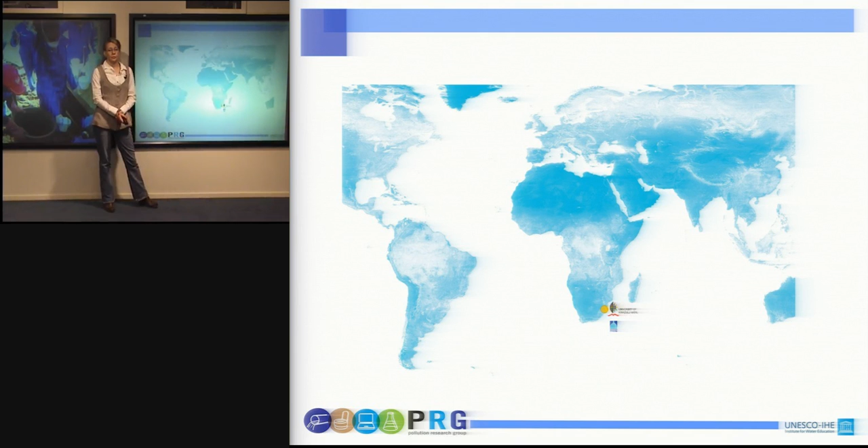The qualitative characterization has been already covered by Linda Strande in one of the other keynote speeches, and for that reason I'm not going to cover it. I work at the Pollution Research Group at the University of KwaZulu-Natal, which is based in Durban, South Africa, and have been working in the field of water and sanitation for the last 4 years, particularly focused on fecal sludge characterization.

What are the characteristics of fecal sludge and how do they vary? The fecal sludge characteristics are very heterogeneous. They depend on many factors, including environmental factors, such as geographical location, the demography of the region, then also climate conditions, the presence of underground water table, and also soil type. The type of on-site sanitation technologies is also an important factor, as well as the quality of the construction.

Also, we have the age of the sludge and the filling rates. So the slower the filling rates, the less frequent the emptying of the sanitation facility would be, and then the more aged the sludge would be. So the more aged the sludge would be, then the more stabilized it would be.

Then also we have another factor, which is the toilet use, which is defined by different specifications, such as number of users and their diet. Also the frequency of the use, whether the toilets are dry or wet, whether they're flush toilets or there is no water introduced into the system.

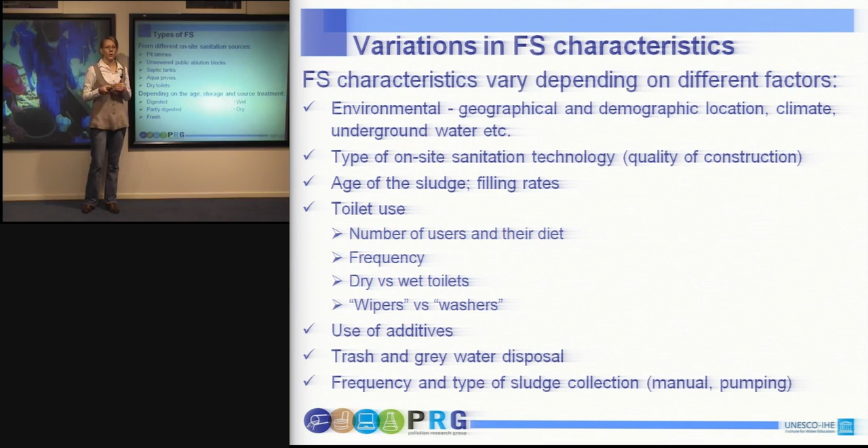According to this, we can distinguish between different types of fecal sludge. We can classify them by the type of on-site sanitation sources, such as pit latrines, septic tanks, dry toilets, such as urine diversion or composting toilets. Also, depending on the age, the storage, or the source treatment, we can have stabilized or digested sludge, semi-digested sludge, or fresh sludge. Depending on the type of use, on the type of system, whether we flush or not, we can have wet or dry.

Coming back to the fecal sludge treatment targets and objectives, the main aim is to provide safe environmental and public health, which supports the entire chain of fecal sludge management, starting from treatment, discharge, end use, or disposal. To meet this aim, there are a number of objectives set, which are pathogen inactivation, stabilization of the organic and the nutrient matters, and also the safe end use and disposal. The dewatering is an important step because this provides significant reduction of the volume of the fecal sludge, which makes it a lot easier for transportation or further treatment.

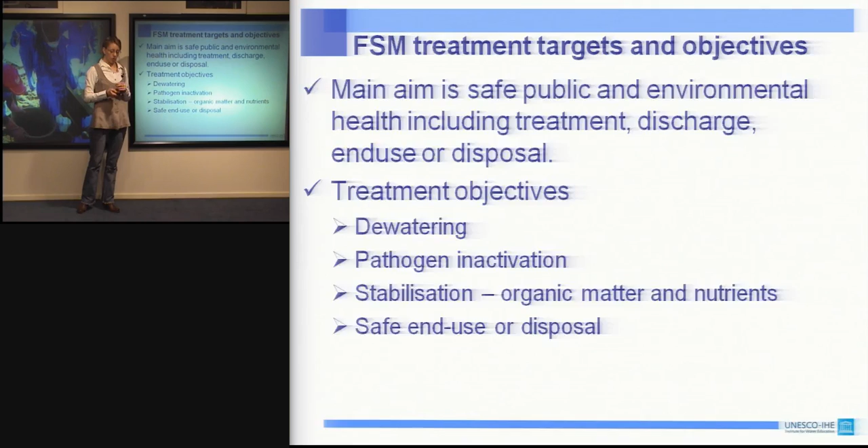So what are the important parameters for fecal sludge characterization? I have summarized in a table some of the most commonly used and essentially the most important parameters for fecal sludge characteristics. Some parameters are not included here. This doesn't mean that they are not important for specific types of technologies or specific purposes, but this is a broad summary. I have grouped them into 4 categories, and the first one is chemical properties. These include moisture content, total solids, suspended solids, ash content, and volatile solids content. Also, COD, which could be total or fractionations of the COD, pH, also ammonium, TKN, phosphates, orthophosphates, potassium, etc.

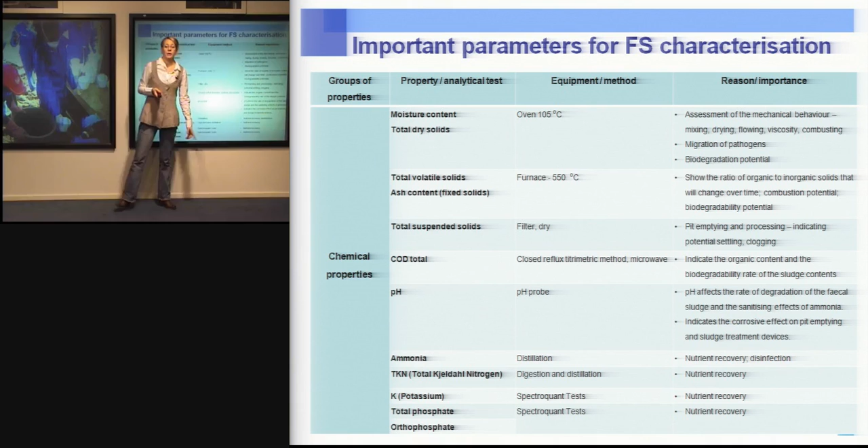In the last column, I have included the reason and the importance of why we need to determine these kinds of properties. For example, if we take the moisture content, this gives us an assessment of the mechanical behavior of the fecal sludge as a material for processing like mixing, drying, flowing, or combusting. It is also an indicator about the biodegradation potential of a sludge, knowing also the age and in combination with the COD values. And also, it's a good indication about the potential migration of pathogens. If, for example, we take the ammonia, TKN, phosphates content, and potassium, this gives us the potential nutrient recovery values, given that the fecal sludge has been treated for pathogen inactivation.

The next group is physical and mechanical properties, such as density, particle size distribution. Also, we have sludge volume index, osmotic pressure, rheological properties, and sludge penetration resistance. Why are these important? They provide background information which could be quite essential for the design of pit emptying devices or mechanical treatment of fecal sludge. If we take, for example, the rheological properties, they give a good estimation of the change of the viscosity with increasing shear rate, which also provides the essential information for design of pit emptying equipment and also mechanical treatment processes.

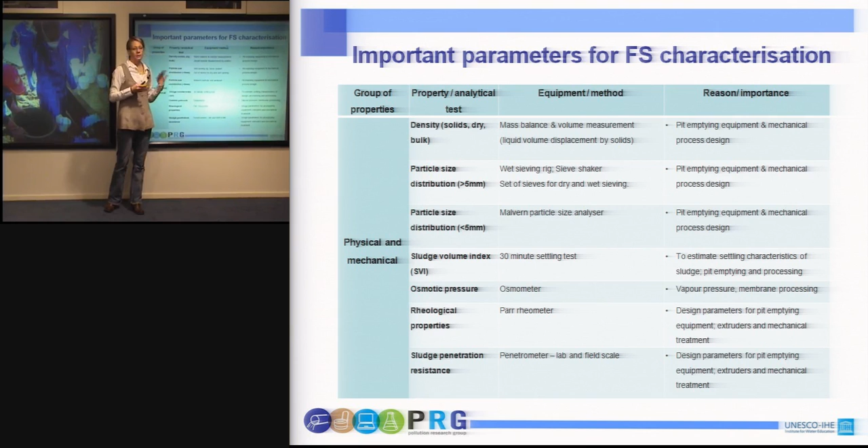The next group is thermal properties. They're mainly important for thermal treatment processes or design facilities for processing such as combustion, heating, and drying. Here we have incorporated thermal conductivity, specific heat, and calorific value.

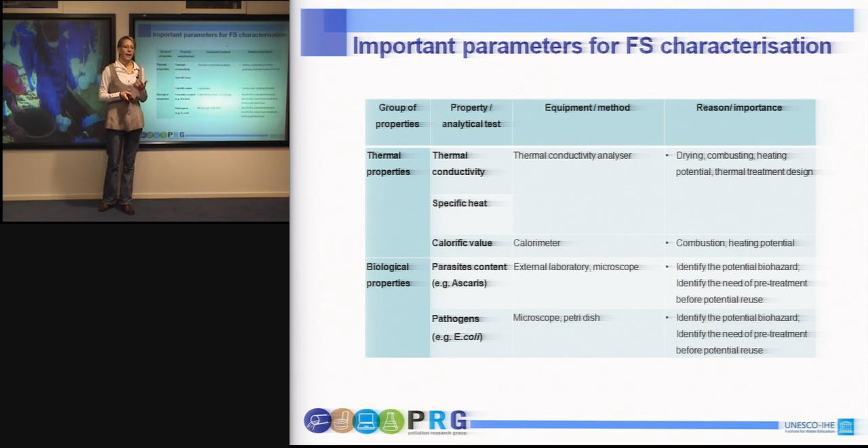Also, the last group is called biological properties, which incorporates parasites content and pathogen content. They are very important, coming back to the aim of fecal sludge treatment, providing safe public and environmental health. So if we take, for example, the Ascaris content, this is a very important indicator. Why? Because the Ascaris eggs are very resistant to any type of treatment technologies. So it's considered that if we manage with a certain treatment technology to destroy the Ascaris eggs, then supposedly we have already destroyed any other pathogens present in the sludge.

What are then the challenges when we measure such fecal sludge properties? We mentioned already that the fecal sludge is highly heterogeneous and varies between different conditions or different sanitation facilities. So if we take sludge coming from different on-site sanitation facilities, the properties may vary highly. But also, if we take the sludge coming from one and the same type of on-site sanitation facility, but from different toilets, we can observe a high variation as well in the properties, depending on the number of users, the load, etc., factors that we mentioned early on.

And for that reason, we also have high variation of the properties when we collect sludge coming from one and the same toilet facility. Why? Because at the different sections of the sludge, you have different degradation rates, hence different moisture content, and this would also result in heterogeneity of the sludge properties within one and the same toilet facility.

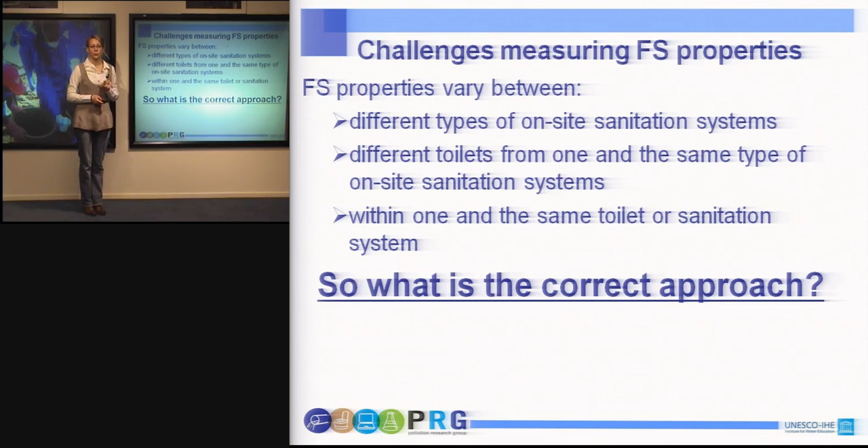So what is the correct approach for measuring the fecal sludge properties then? This would be the development of standard methods and procedures, or so-called standard operating procedures for fecal sludge analysis. They could be applicable for the sampling process, for all the different analyses we mentioned, whether the analyses are performed in the field or in lab conditions, and also covering all the health and safety procedures during the entire process of sampling, transportation, storage, analysis, and disposal.

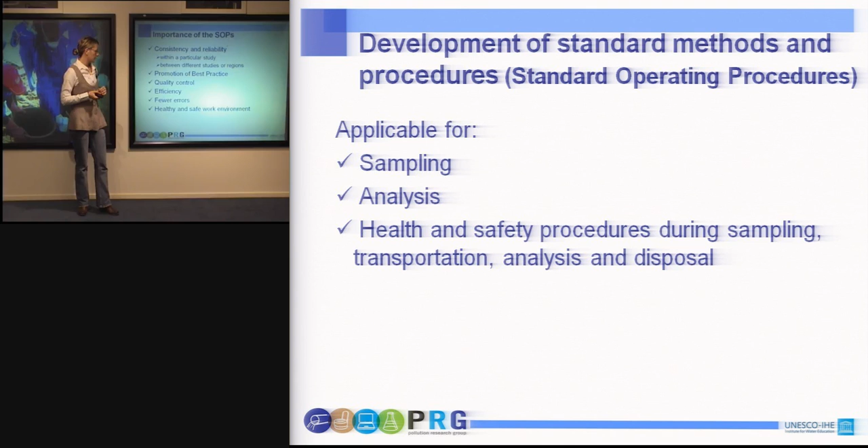So having standard operating procedures is important in many fields for various reasons. Some of them are summarized here, like consistency and reliability of the data, also good quality control, efficiency of the testing methods, reduction of errors, and a healthy and safe work environment.

Currently, there are no standard operating procedures for fecal sludge measurement, and standard methods for water, wastewater, and soil are adopted for the fecal sludge. However, these methods are not the most suitable because the fecal sludge differs in its characteristics. As we said, it's highly heterogeneous, but it also has higher solids content compared to water or wastewater. And then we have a high variation even between the different sludges coming from the different on-site sanitation facilities. So the lack of standard methods for fecal sludge results in incomparable data sets generated between different regions and institutions, which is already raising a problem.

What would be the way forward? There is a need for collaboration between institutions working on fecal sludge characterization for development of standard operating procedures for fecal sludge characterization. And this will not be a once-off task because the methods evolve and change over time.

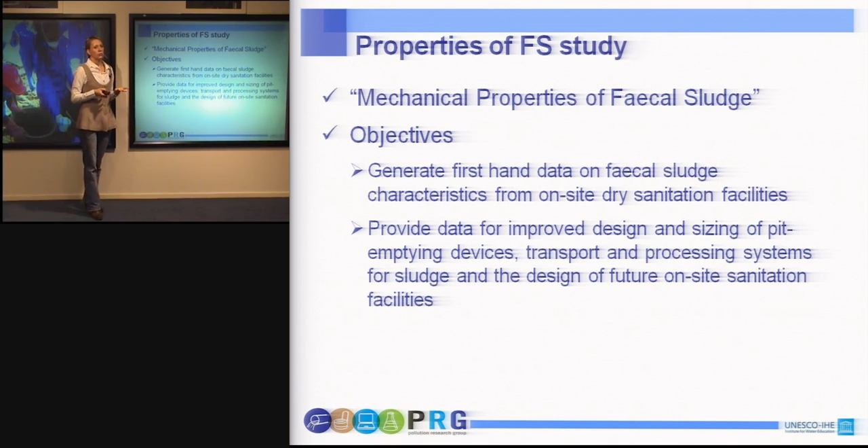The project is funded by the Bill and Melinda Gates Foundation. It has been already completed. The main objectives were to generate first-hand data for fecal sludge characteristics from dry on-site sanitation facilities in Durban, South Africa. And then the other objective was to provide data for improved design or sizing of pit emptying devices or devices for transport and processing of sludge.

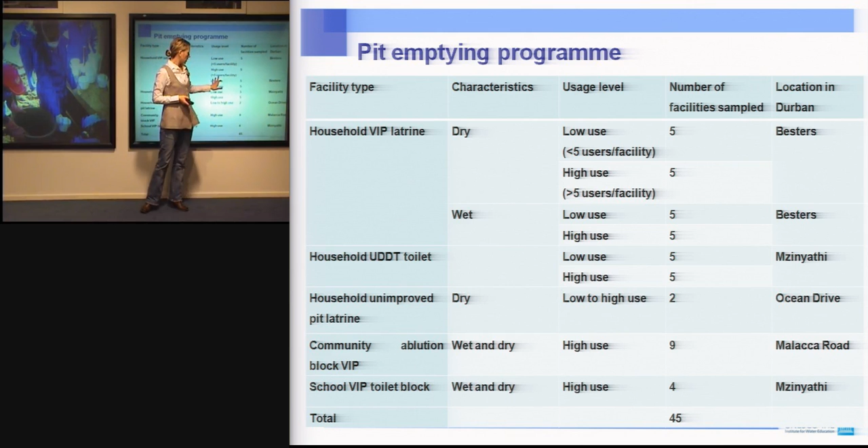There was an extensive pit emptying program focusing on dry on-site sanitation facilities. We have emptied a number of different ventilated improved pit latrines, which were on a household level or community ablution block or school level, also urine diversion toilets and unimproved pit latrines. We have also aimed at a different usage level, which incorporated low use with less than 5 users per facility or high use with over 5 users per facility.

And then, when the project started, we firstly proceeded with the sampling. So what we realized then is that no matter how good our standard operating methods for testing and analysis in the laboratory are, because of the heterogeneity of the fecal sludge, we have actually questionable data set once again when we speak about sampling.

So, for example, I mentioned early on that we can have large variation between sludges coming from one and the same type of facility or from different ones. So how do we ensure, when they have different filling rates, when they have different age, that the data is comparable between each one of them?

So what we did firstly was with the dry household ventilated improved pit latrines, we selected samples from 10 dry and later on 10 wet pit latrines. So we collected samples from different heights of the sludge which was accumulated in the pit, and actually developed a method which was followed for all the other pits that have been sampled.

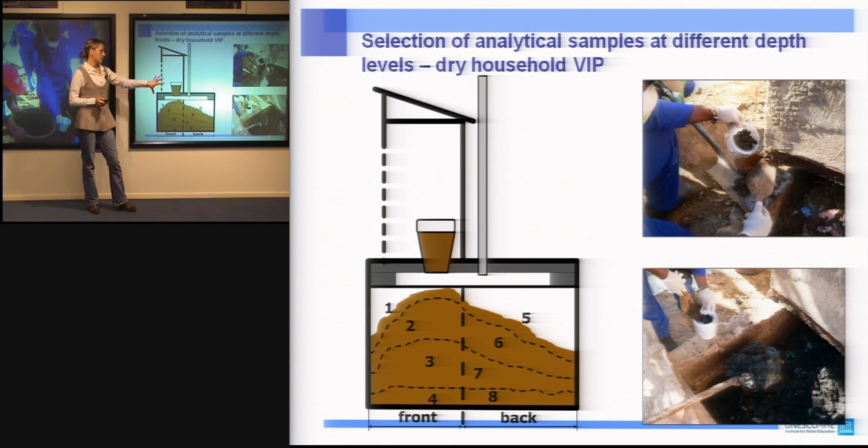And then the same method was used for each other dry household pit we have been selecting, and we compared the data between the different layers or as a composite sample. For the wet VIPs, they're called wet not because there is any flush water used, but because the pit, for some reason, was full of liquid.

We established that most of these pits were at the bottom of the hill, and although there was no scientific evidence, we think that it had something to do with underground water infiltration or the effect of the rainy season. So what we discovered was that we had liquid in the pit, and then the sludge was concentrated at the top. So we developed a different method for sampling from this pit because it was not exactly comparable with the previous dry ventilated improved pit latrines.

For urine diversion toilets, again, we developed a different type of sampling procedure, which incorporated two types of vaults, active and inactive vault. The active one was already in use, and the sludge was a lot more fresh. And then for the inactive or the standing vault, the sludge was a lot more dry and stabilized because it hasn't been used for a certain period of time.

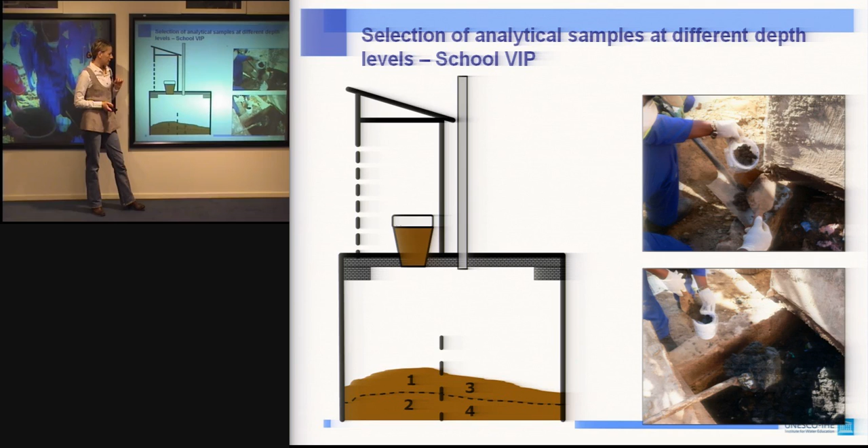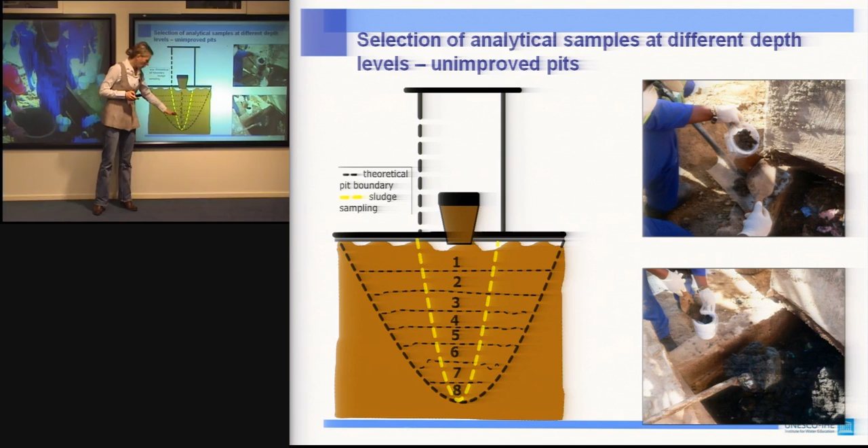For school ventilated improved pit latrines, we had a similar method as for the first one, the household pits. We also had unimproved pit latrines which were already not in use at the time we went sampling. And then we just dug holes and collected samples from different levels of the pit.

So just to summarize, what is important when we develop fecal sludge sampling methods? The sampling should be, first of all, based on the local fecal sludge management context. Why? I was speaking about pit latrines, which are very appropriate for the context of Southern Africa. But for example, if you go to Southeast Asia, where we have pour flush toilets, and the sludge is collected into septic tanks, then the context of sampling would be completely different. Maybe it would come from the truck, or because the sludge is very much liquid, a different technology would be developed.

Then also the sampling methods should fit the end use of the data. So it depends what we need the data for. That's how we need to develop an appropriate sampling method. For example, if we need a large amount of sludge for testing of a new prototype, then we don't need to collect the different small samples. We need to collect a composite sample of the entire pit.

Then the standardized methods should be applicable for the different types of on-site sanitation facilities, as we already mentioned. We can't apply one and the same method for every type of on-site sanitation facility because it simply won't be applicable. And then the sampling timeline must be coordinated with the laboratory analysis because we would like to avoid storing samples for a long time, and it's better to collect them, transport and store them for a short time, and then perform the analysis.

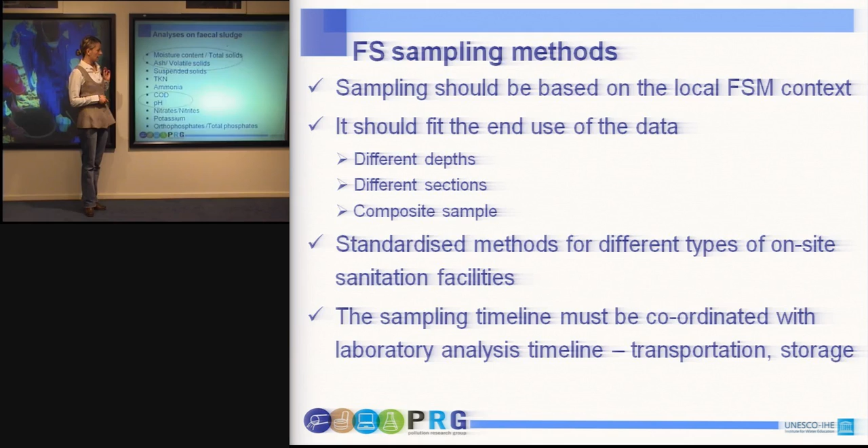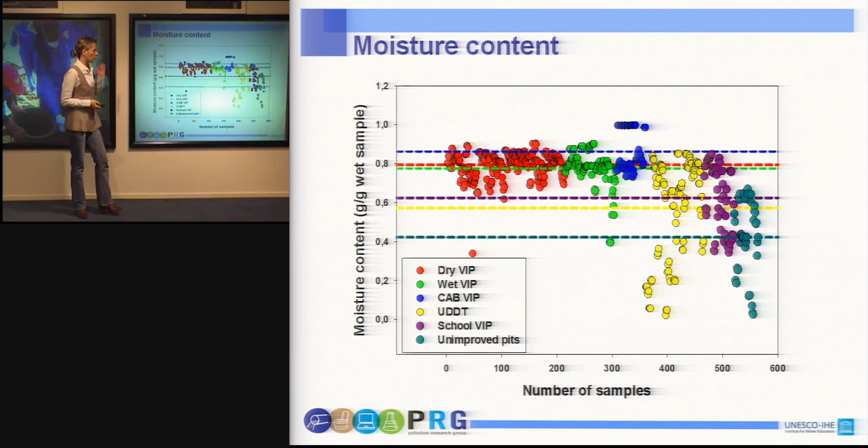If we go to the ash content, we see an even higher variation of the properties. For example, for dry household VIPs, the ash content varies between 0.2 to 0.8 grams per gram dry mass. It is very important to stress that we have been expressing the properties in gram per gram dry or gram per gram total solids. Why? Because all the sludges vary significantly in their moisture content. And unlike wastewater, where the moisture content is over 98–99%, here we have a large variation, as we saw earlier on. And we would like to have a more stable basis for comparison of the data. So that's why we have been expressing it in gram per gram total solids.

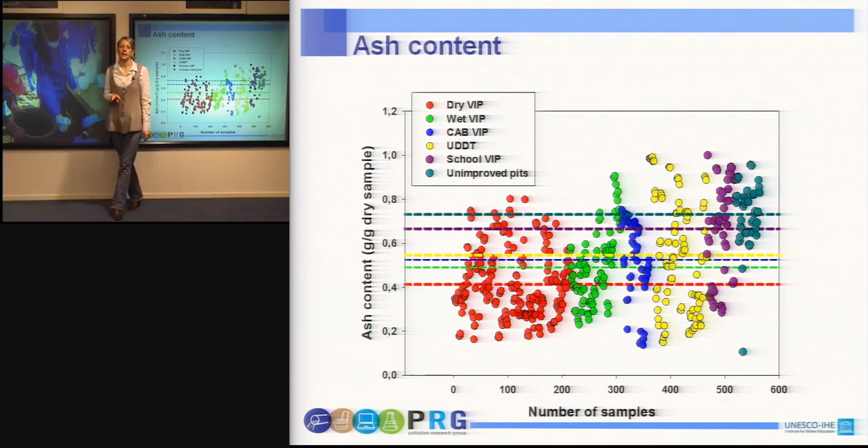So we see, for example, here for the urine diversion toilets, we have a much higher ash content, which is also, again, coming from the standing or inactive vaults.

The total COD also varies quite significantly. The higher values usually come from the top layers where we have a very fresh sample. It varies between nearly 0 to 1.6 grams COD per gram total solids or dry sample. We can see that the stabilization process for some of the urine diversion toilets and some of the aged samples from the unimproved pit latrines has taken place.

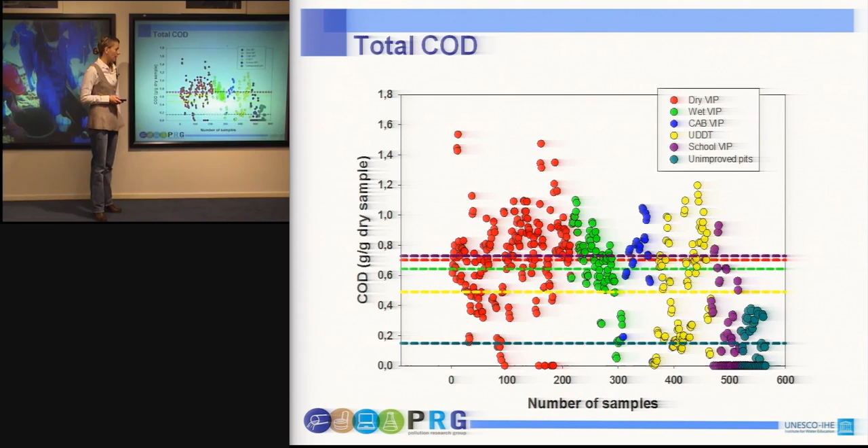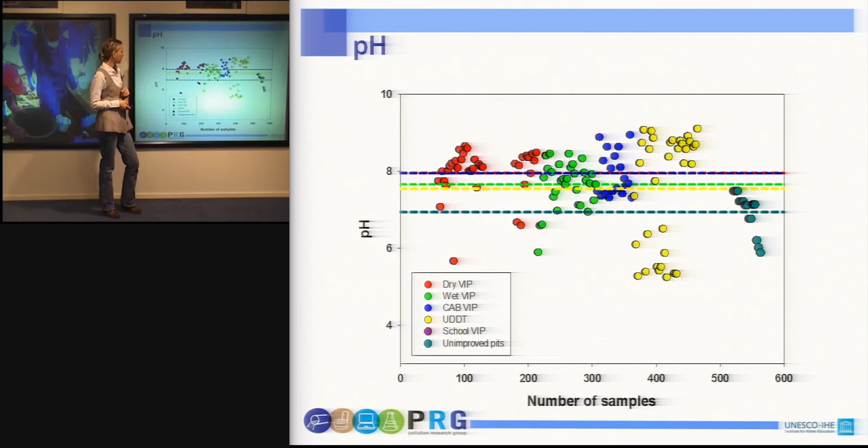The pH variation was also quite significant. However, we had established a range. The average values, for example, for dry and wet VIPs was something between 7.5 to 8. The calorific value also presented very good variation. Expectedly, there is a correlation between the COD values and calorific values. The aged samples, such as unimproved pit latrines, demonstrated much lower calorific value than some of the fresh samples. The average calorific value was about 15 megajoules per kilogram, which is very close to that of wood.

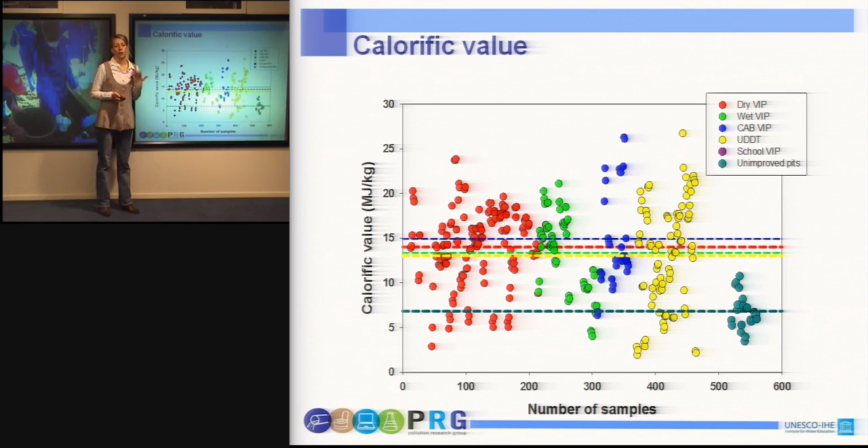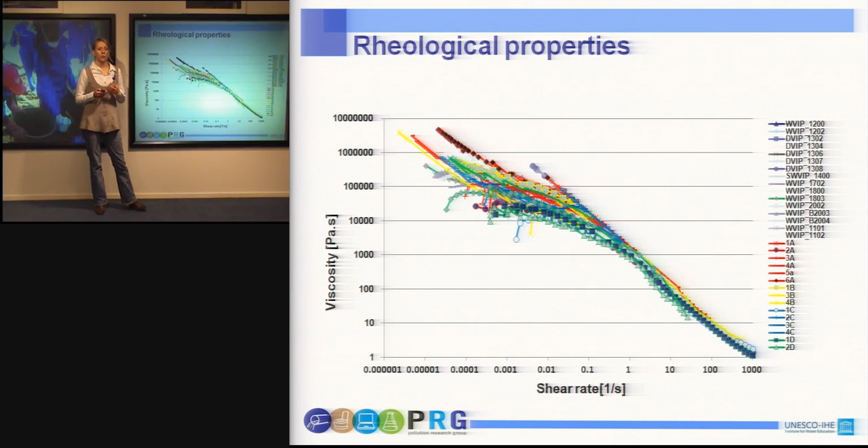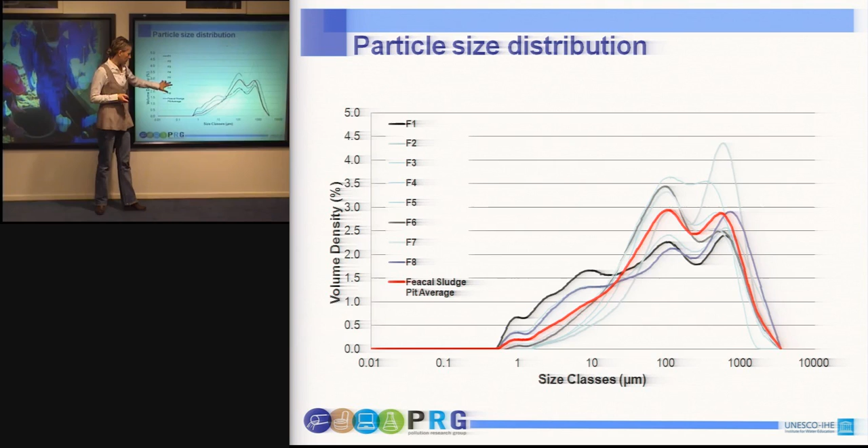Then if we move to the rheological properties, it was observed that the fecal sludge has shear thinning with increasing shear rate, which means that it turns more liquid with increasing shear rate, which is good for the design of pit emptying devices and pumping. Then we have particle size distribution within one and the same pit at the different sections, as was demonstrated early on.

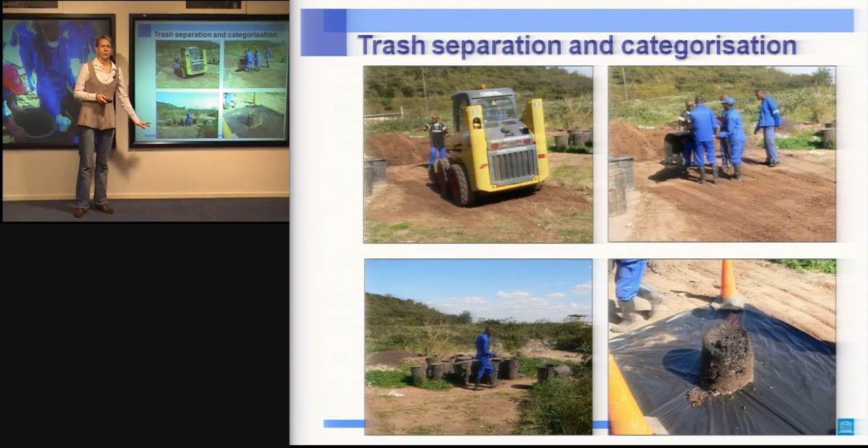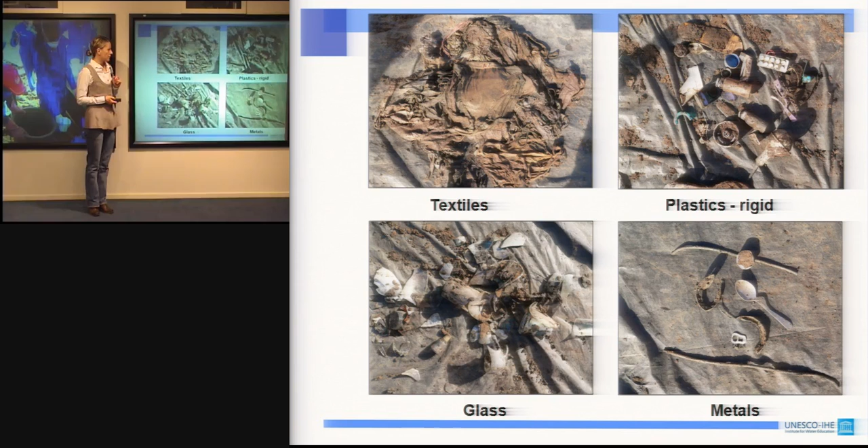We did some studies on the trash content of pits, or the trash mixed with fecal sludge in some of the on-site sanitation facilities we have analyzed. We did a manual categorization from 3 or 4 different on-site sanitation facilities, and categorized them by different material groups, such as paper, soft plastics, hair extensions, menstrual products, textiles, glass, etc. So what was the distribution?

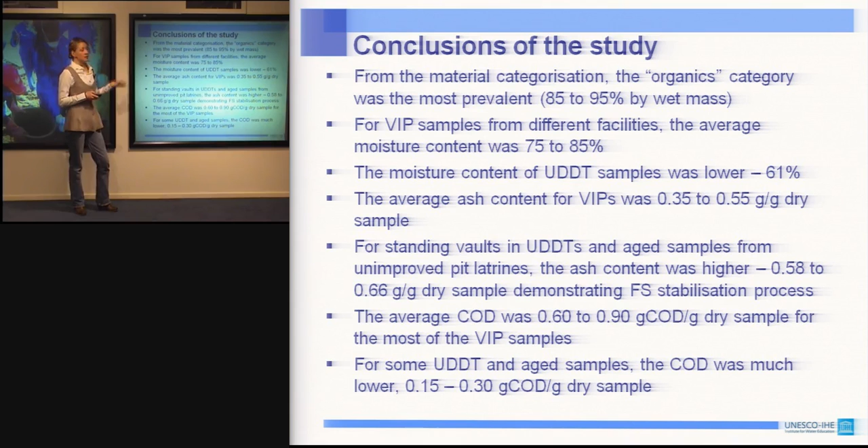So the conclusions of the study, we've already passed through most of the information: 75 to 85% moisture content for all the VIP samples, 61% for urine diversion toilets. The average calorific value was between 11 to 15 megajoules per kilogram. For the aged samples it was just 5.

It's important also to mention, it didn't come on the slide, but we did quite a lot of analysis on helminth eggs or Ascaris content, and most samples demonstrated values higher than the limit set by the World Health Organization, which is 1 helminth egg per gram of total solids, which shows that this sludge needs to be treated further for pathogen inactivation.

So the most important part of the study was what were the outcomes, what did we achieve as a result of this study. First of all, we developed fecal sludge sampling methods and techniques, which also helped us to develop standard operating procedures for analysis of fecal sludge. The study was a baseline for further similar studies by other organizations because we disseminated our knowledge and collaborated with other organizations to provide a similar platform of study. And we disseminated the crucial information required by other partner organizations for pit emptying or other treatment technology designs.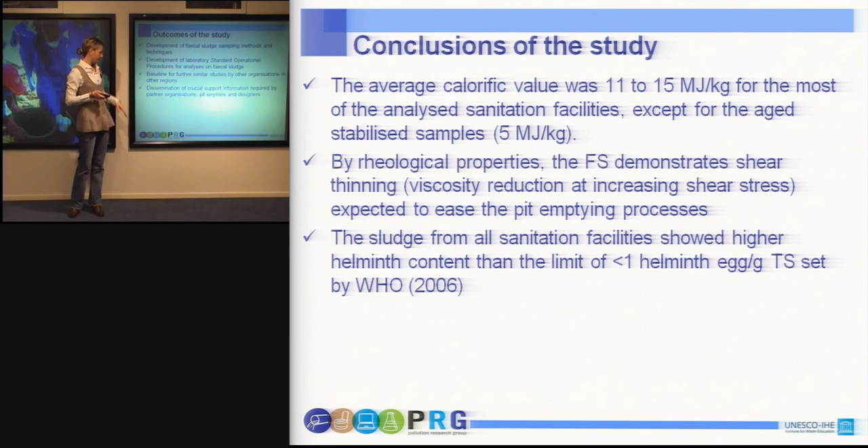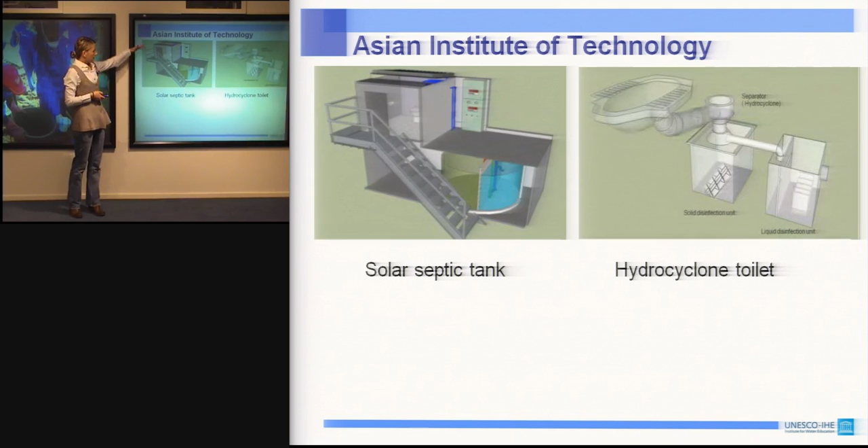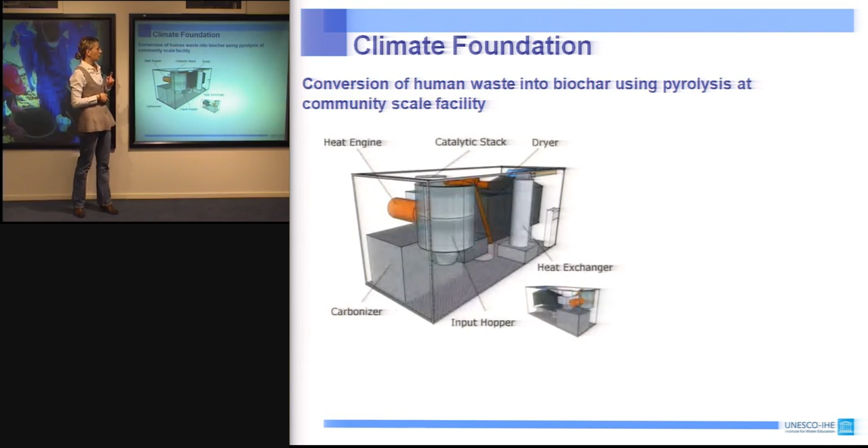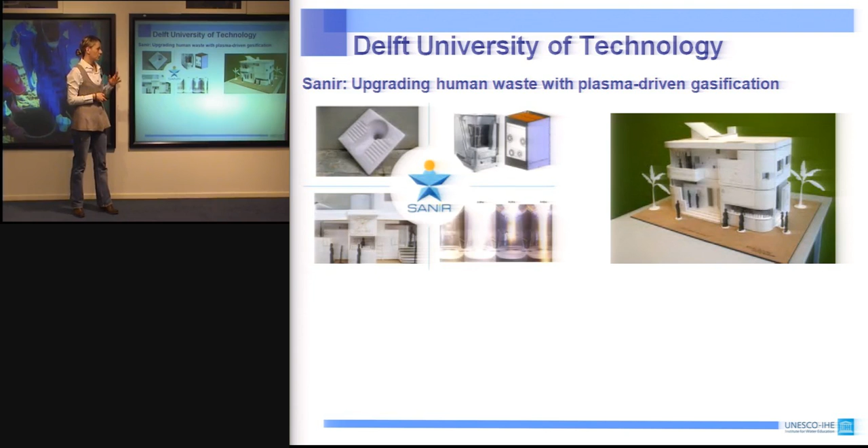Just to give an example of the different organizations we have been collaborating with. This is just a small list of them, to show how we collaborated to support them in developing different technologies. That's the Asian Institute of Technology with their solar septic tank and hydrocyclone toilet, California Institute of Technology, Climate Foundation for biochar production from fecal sludge, the nanomembrane toilet at Cranfield University, Delft University of Technology with their plasma-driven gasification system, Duke University with supercritical water oxidation, the Blue Diversion toilet by Eawag,

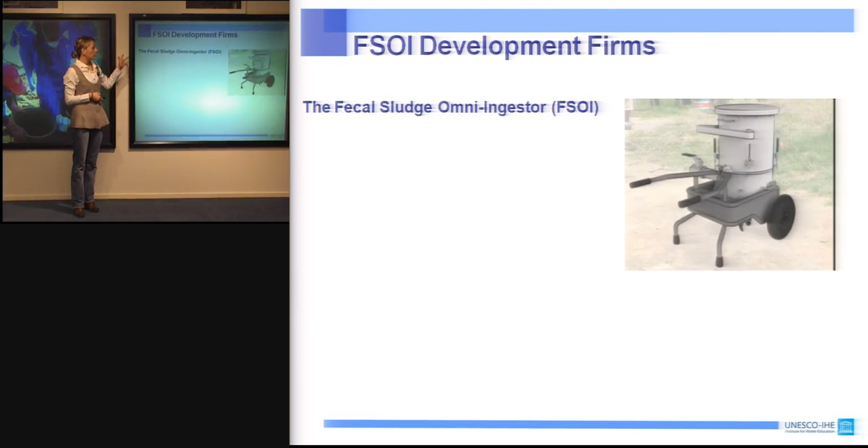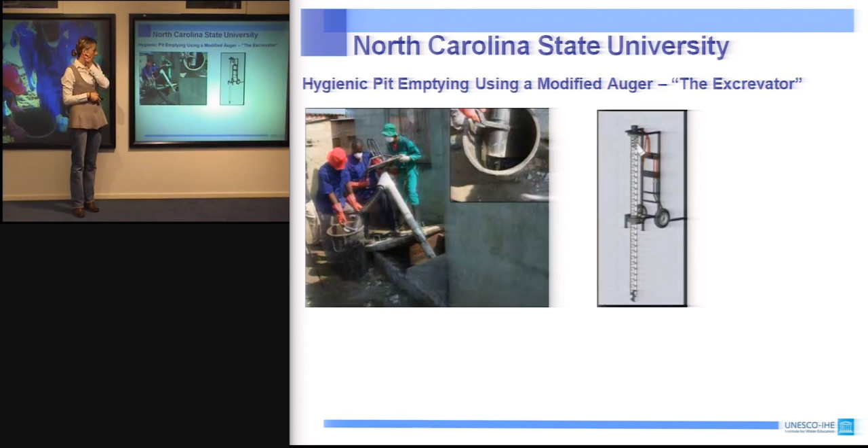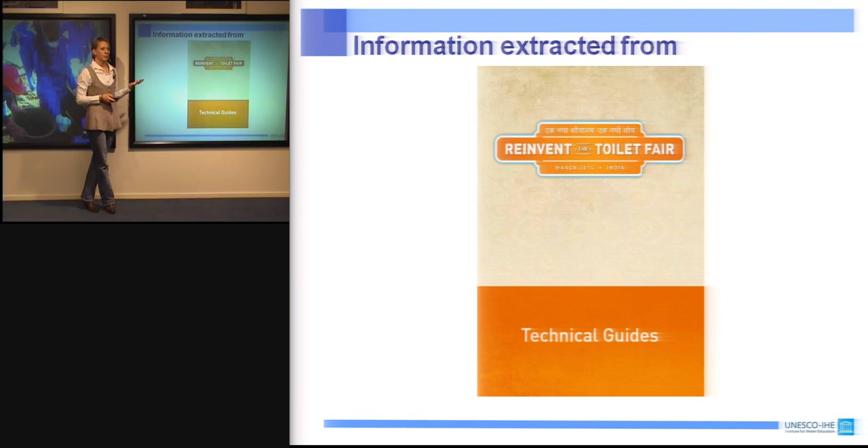the Omni Ingestor for pit emptying, the Omni Processor for large thermal treatment of sludge, pressure cooker type of treatment. Also, we have North Carolina State University with the Excrevator for pit emptying, RTI International with their system, Synergy, etc. I haven't given any details. They're available in this guideline, which is available to download on the internet or in the course materials.

So the overall conclusions of this speech. A good understanding of fecal sludge characteristics is crucial for the improved design of pit emptying devices, transport and processing systems of fecal sludge. Also, it is a baseline for the design of innovative technologies for fecal sludge collection, transportation and processing. And the standard operating procedures for fecal sludge improve data quality through consistency and reliability of the data, comparability of the results from different systems and different regions, and provide database generation for fecal sludge.